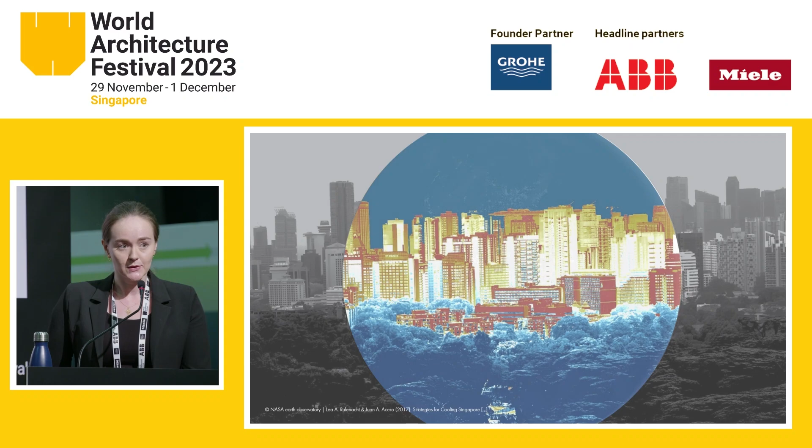Even though our cities only cover 1% of our land surfaces, the urban heat island effect accounts for at least 11 to 16% of global warming, reaching up to 30% in regions such as China. Building facades represent the largest urban surface area and have a significant impact on the urban microclimate.

Singapore might be a perfect example of a city suffering greatly from heat, with an average temperature of 29 degrees for the hottest and 26 degrees for the coldest months in the year, whereas the green and wetlands in the north indicate, in comparison to the dense city center, a surface temperature reduction of up to 15 Kelvin, mainly referred to the natural cooling effect by water evaporation.

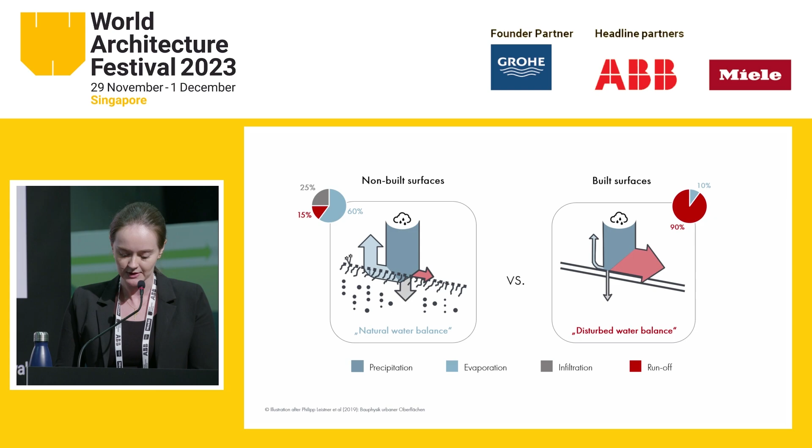While natural surfaces allow for 60% evaporation of incoming rainwater, built surfaces require 90% to be drained off as runoff water into the urban sewage system, which causes the second big scale problem we are facing worldwide: inundations that affect all cities with a high ratio of sealed surfaces.

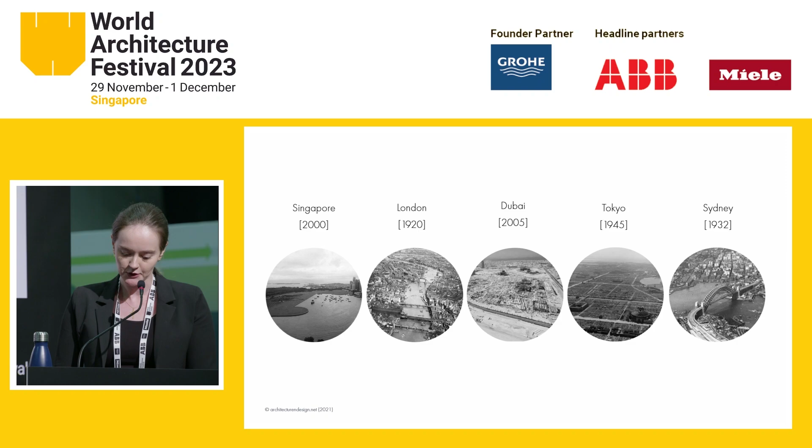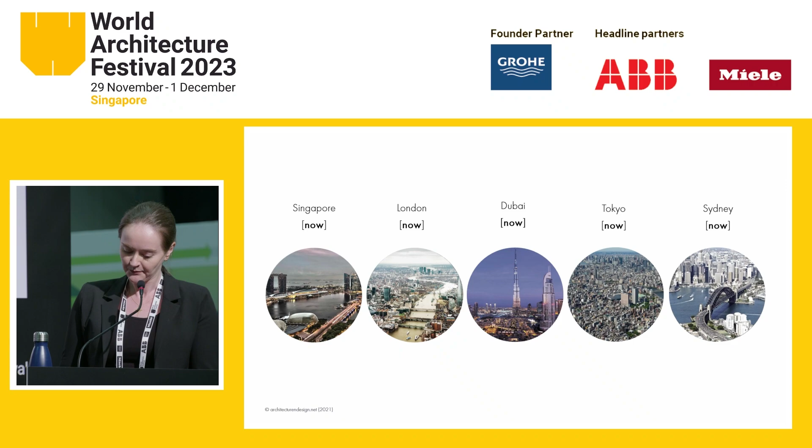With the increasing densification of our cities and the rising precipitation rates due to climate change, the update of our urban sewage infrastructure is still missing. In this context, let me add that the sewage system of only Germany is about 15 times the equator length. So redimensioning the global sewage infrastructure of all these vulnerable cities worldwide would be an almost impossible economic burden for our world and not solve the heat island problem worldwide either.

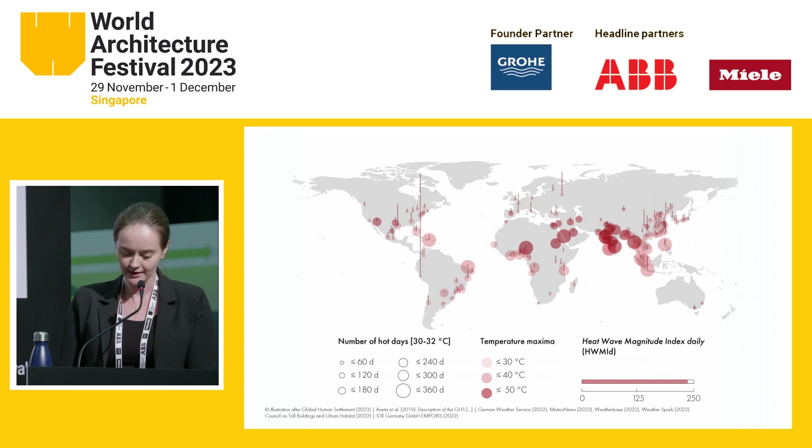But there's also a huge potential in the facade of increasingly tall buildings, not only in terms of an aesthetical design revaluation, but also in terms of an ecological activation to reduce the urban climate footprint without occupying any further ground surfaces in our cities.

That's exactly where we come up with HydroSKIN, an artificial, lightweight retention surface in the building facade to absorb the wind-driven rainwater that hits the building facade at an angle, to make this water accessible inside the building in order to reduce fresh water and energy consumption, as well as to humidify the textile skin on hot days for cooling the building and its environment in a sustainable way by evaporation.

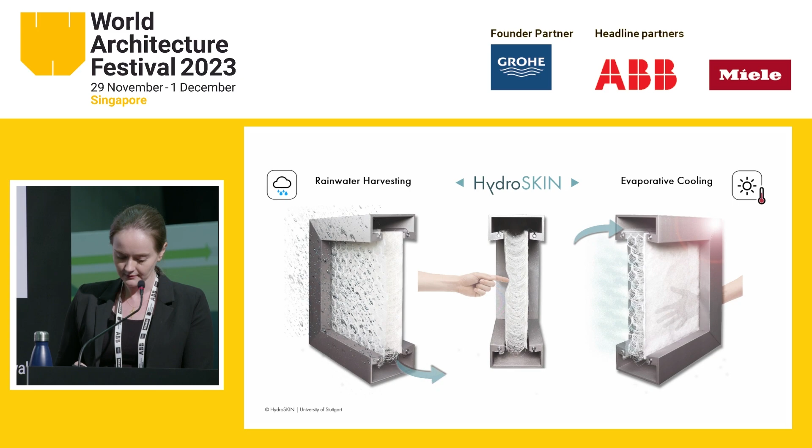So now you might ask, why are they using textiles in the building envelope, which are certainly a traditional, even if not a quite conventional building material? Well, it is not only about lightweight construction in order to reduce the building's embedded mass, grey energy and CO2 emissions to a minimum of 1 kilo per square meter, whilst offering a highly customizable building envelope solution enabling the installation of HydroSKIN to almost all new and existing building types.

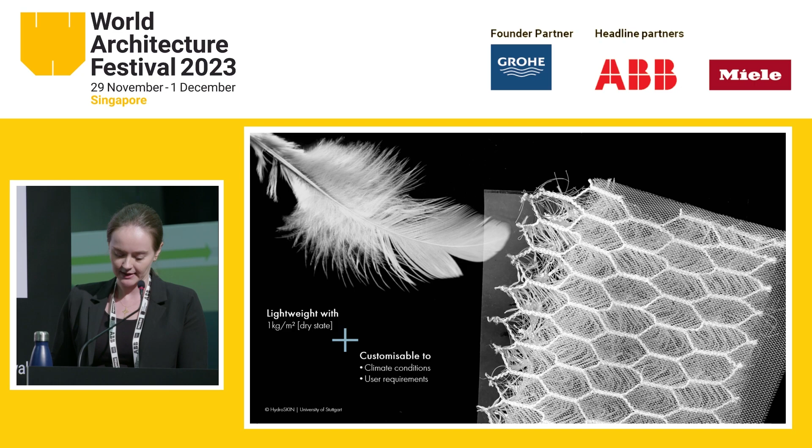But whilst conventional hard facade surfaces, as glass in this case, reflect incoming rainwater droplets with a great splash off, the textile outer layer of HydroSKIN offers such a high permeation that allows the water droplets to almost fall through.

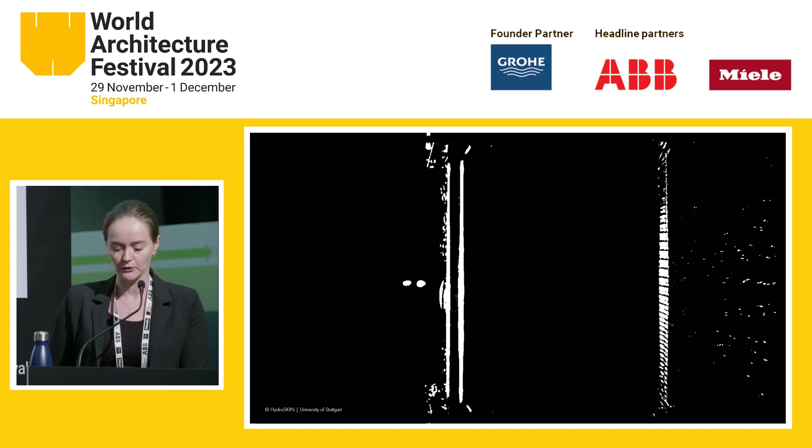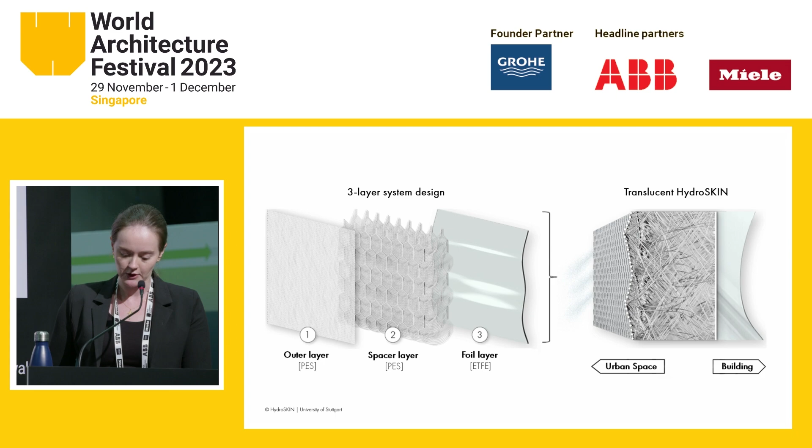So HydroSKIN consists of a translucent, multi-layered textile and film-based facade design comprising an outer layer, a special spacer layer and a foil, and integrating an additional highly absorbent intermediate layer to extend its cooling performance. For example, in very hot and dry regions this may result in an opaque system design.

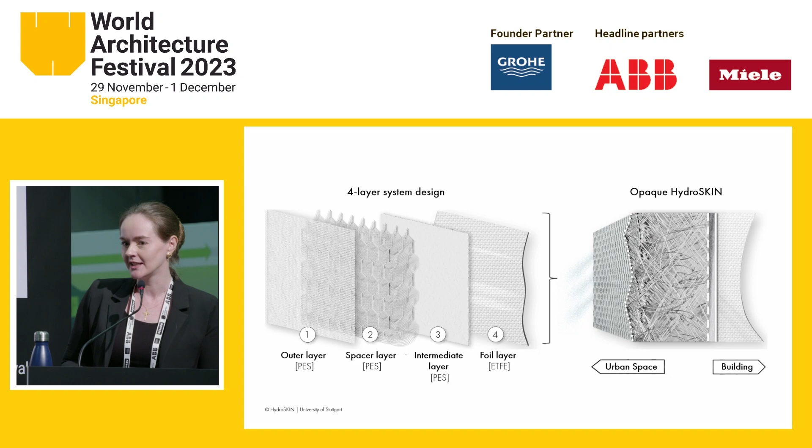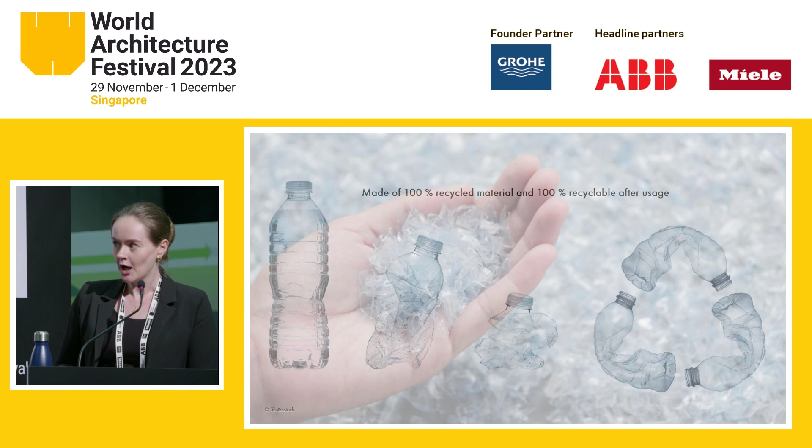All these layers are joined together by means of textile manufacturing techniques into an easy to disassemble system, which is not only fully recyclable, but can also be made out of recycled materials such as PET bottles.

Let's have a more detailed look on how it works. Well, the wind-driven raindrops are split by the water-permeable outer layer and transported via the connecting threads of the spacer layer to the water-guiding foil, where they are drained off into the lower profile system.

And during irrigation on hot days, the droplets accumulate in this spacer fabric, and the high air circulation in this open porous spacer textile favors water evaporation and enhances the cooling performance of the facade.

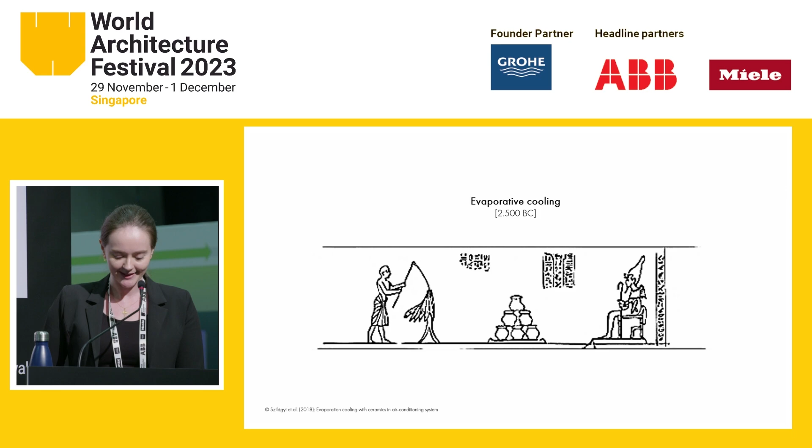Many years ago already, they made use of evaporative cooling by water-filled ceramic pots, a very simple cooling technology that doesn't need any further energy supply, excluding the manpower in this case, since evaporation is nothing less than the phase transition of water from its liquid state to the gaseous state at temperatures below the boiling point, which extracts heat energy from the surrounding air that causes the cooling effect.

And also our skin uses this technology, of course. So textiles open up a unique potential for evaporative cooling, because with a minimum weight per unit area, they provide an enormous surface area that can even be precisely configured.

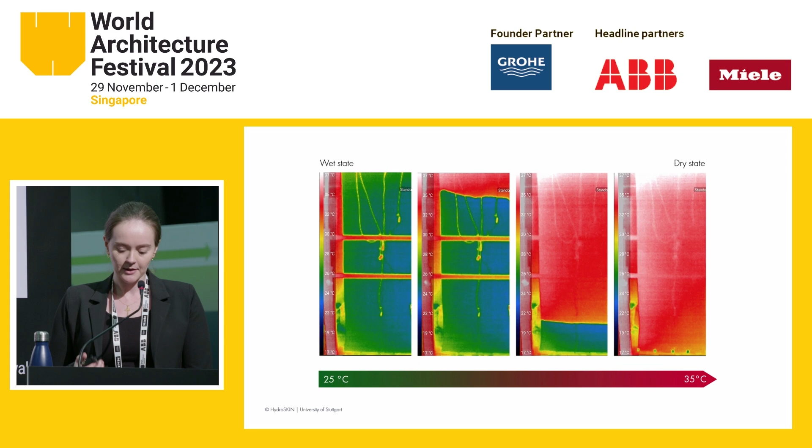And wetting of textiles is accompanied not only by a significant temperature reduction on the one hand, but also by a cool air downflow into the urban space when applied at tall building facades, as you can see on the right-hand side. And as a benefit for height, tall buildings even enhance the cooling performance of HydroSKIN in terms of rainwater absorption as well as in terms of evaporative cooling performance.

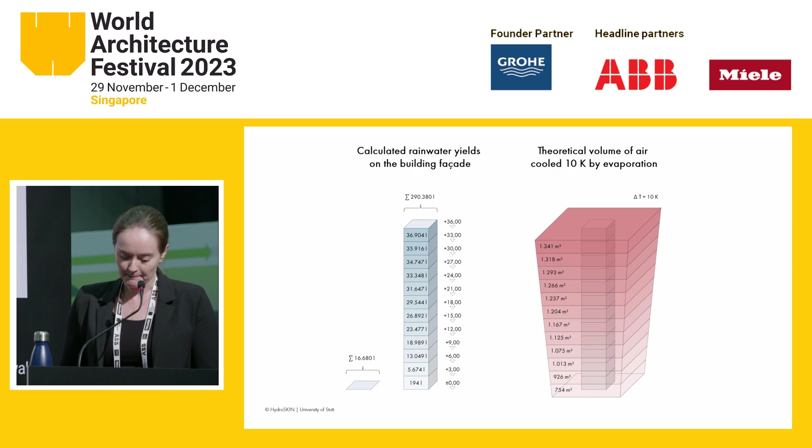Whereas in theory, the roof surface of this small exemplary high-rise building is only exposed to approximately 16,000 liters of rain per year, a more than 17 times greater amount of 290,000 liters impacts the facade surface of the building, and the volume of air that can evaporatively be cooled by 10 Kelvin also increases with the building height by nearly 2 times and is even able to approximately compensate the solar heat emission of a conventional glass facade.

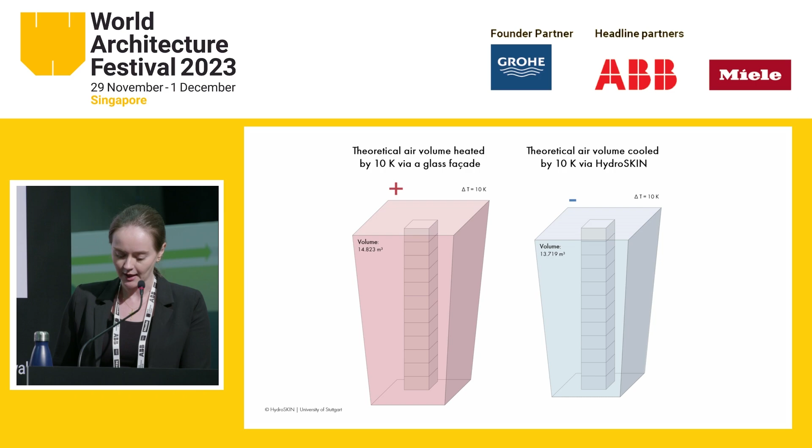In other words, each square meter of HydroSKIN could almost neutralize 1 square meter of conventional building facades in our cities.

And since almost 1 year, the first HydroSKIN prototypes have been installed at this small exemplary high-rise building at the University of Stuttgart to verify their performance for the first time under real weather conditions with great results.

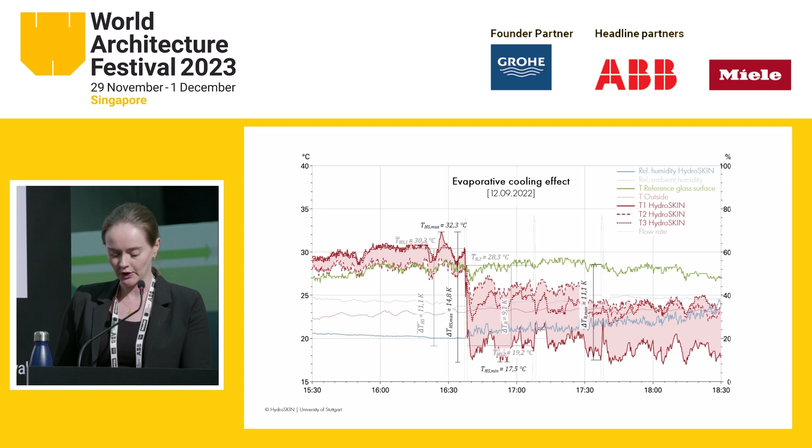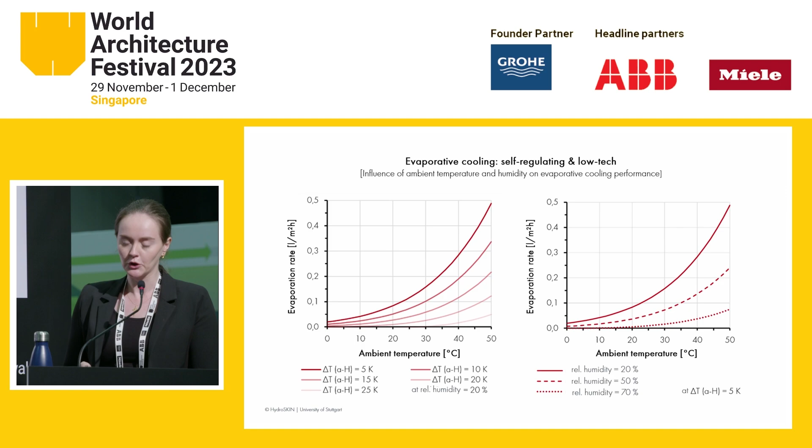Our measurements show a temperature reduction of 10 up to 15 Kelvin on the facade surface depending on the ambient climate conditions, of course, since evaporative cooling also represents a self-regulating cooling principle, which means that its performance can achieve a very high temperature reduction on hot days, but a very low cooling effect on cold days, thereby also excluding any undesirable cooling out of the building on rainy winter days.

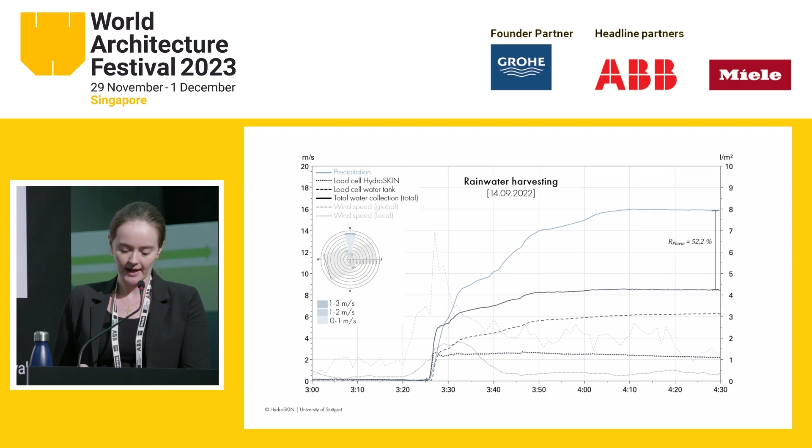Even in disadvantageous wind conditions, more than half of the precipitation water has been absorbed, and by means of an intelligent rainwater use concept, one can obtain up to 46% of fresh water savings in a residential building when using rainwater for plant irrigation, toilet flushing, wash machine operation, or building service components.

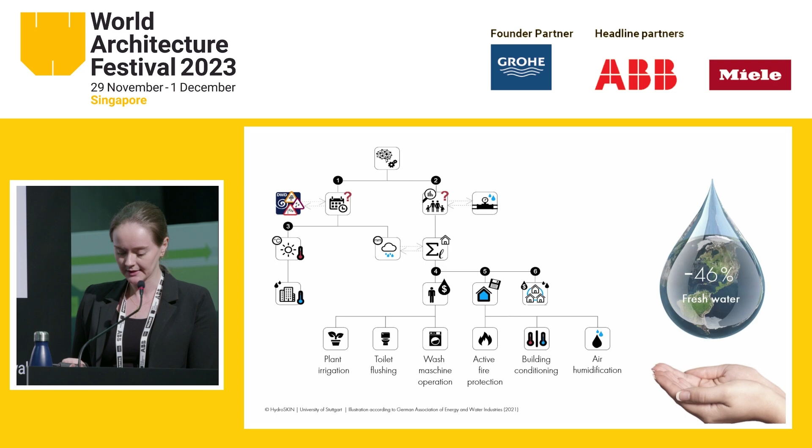Depending on the water use concept, up to 26% of energy consumption can be saved for water pump and cooling purposes, especially above a low-rise building typology. For high-rise buildings and above, there's even an annual saving potential of 3 million kilowatt hours per building.

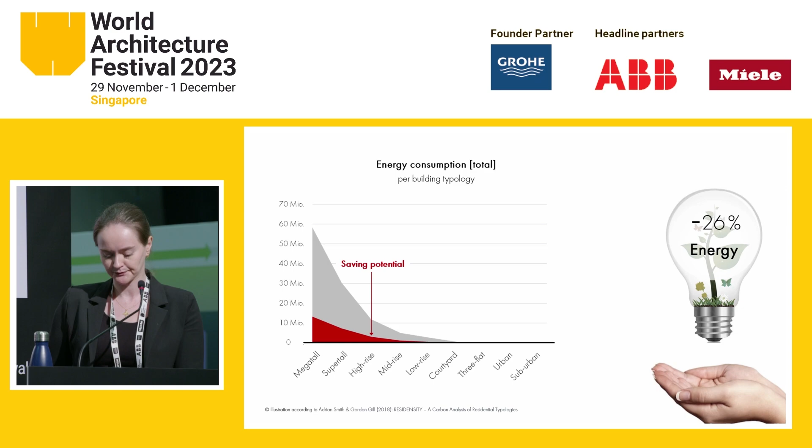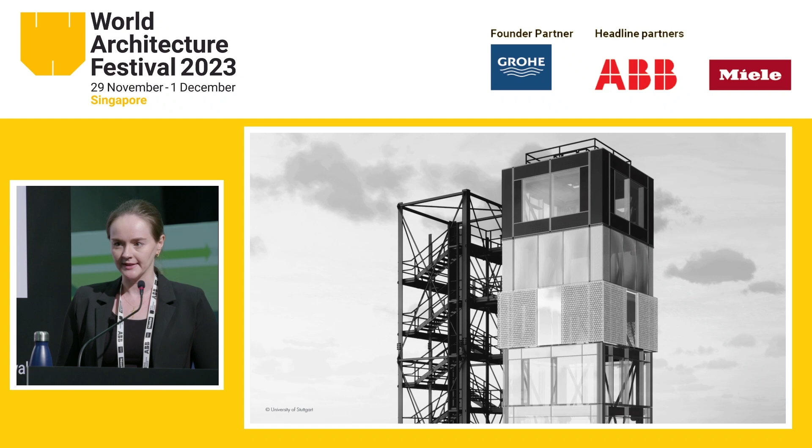So how do we bring this huge potential into building practice? Now that the first hydroskin prototypes have been monitored for more than a year, we are planning to complete two hydroskin facades at our experimental high-rise building in Stuttgart within the next months. Among them, one unitized glass facade with suspended hydroskin curtain wall elements, and one multi-layer, film-based facade system without any conventional building materials, consisting solely of foils, membranes, and textiles.

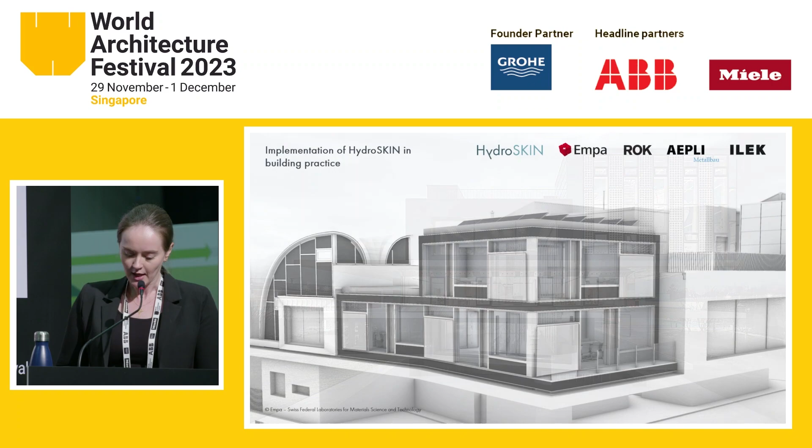Our first commercial project will also be realized in spring next year. It's the nest building of the Swiss Federal Laboratories for Materials Science and Technology in Switzerland, where the easy retrofitability of hydroskin is going to be demonstrated.

Finally, I don't want to leave you with the idea of hydroskin being a unique white curtain that might only disturb the view out of your window, since there is a great wealth of design variations in the field of textile architecture: translucent, colored, 3D shaped, movable elements, as well as the opportunity of precise customization by printing the textiles and foils.

I also warmly invite you to physically discover hydroskin by your own. And when our body suffers from fever, we cool it down with a damp cloth. So why do we not use the same technology to cool down our cities suffering from global warming?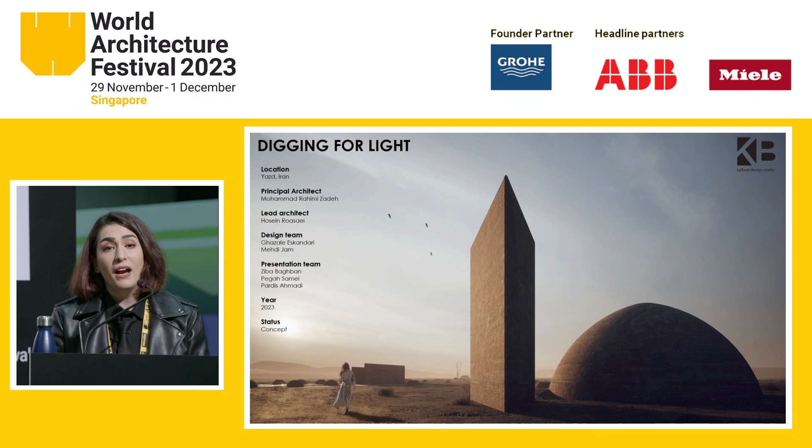Can you imagine a house designed in a contemporary manner that follows the same principles as ancient architecture? Of course, these principles must be updated, but in fact, with minor changes, they can meet our fast-paced technological life. Here we use architecture as a problem-solving tool based on our ancient architecture from Iran.

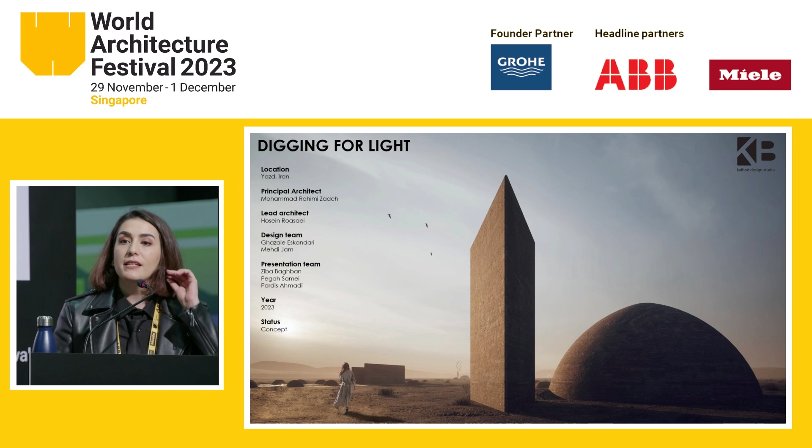Let's begin with the site. The UNESCO registered World Heritage ancient city of Yazd, described as the noble city of Yazd by Marco Polo, and its nearby villages are great examples of Iranian traditional architecture. This city is located amidst the most desolated parts of the Iranian plateau, which stands primarily on a barren, settled land.

A plain with a desertic climate, solely based on its architecture, it has turned into one of the cradles of ancient civilization.

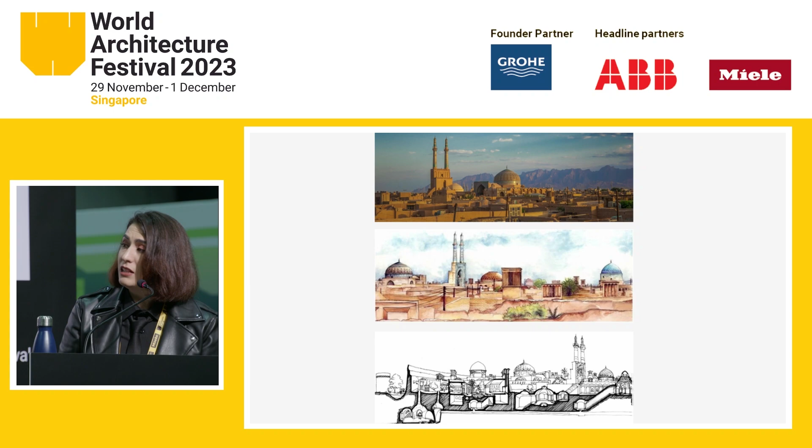Through our in-depth research, we found that the winning element of the ancient architecture of Iran is based on its resiliency, which has managed to turn into a plugged-in system. However, due to the climate of Yazd and its specificness, as it has a desertic climate, its architecture and urban planning follows certain principles to bring comfort to people.

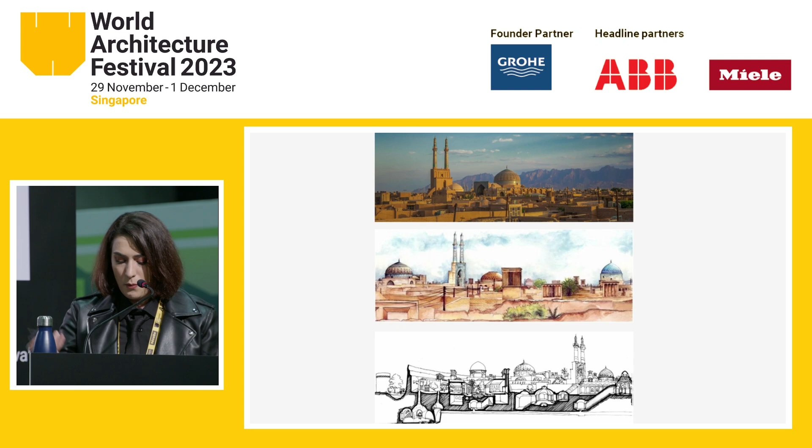Now, the question is, how can these principles be used as a reference in today's architecture? Amidst our research, we found that qanat plays a game-changing role in this resilient system, where each element is connected or plugged into each other through qanat infrastructure.

As you can see, these are qanat systems from the deserts of Iran. We use this approach to define our own project and our own plugin system made responsible and responsive to the harsh climate of Yazd.

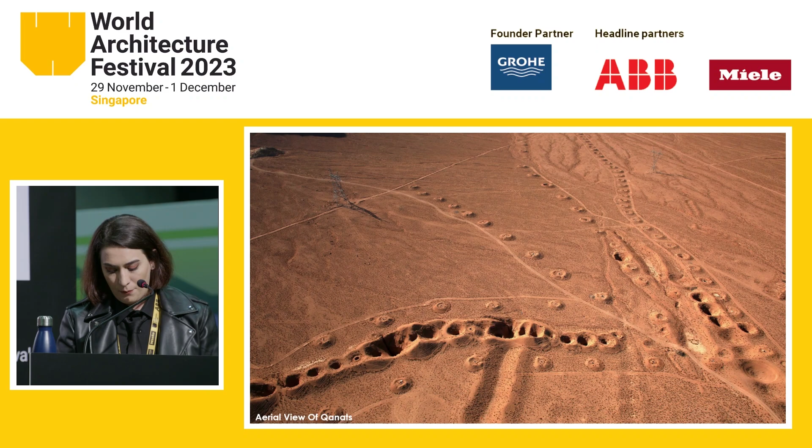To quickly explain what qanat is, we can say that it's made of a series of underground water canals that still function in arid regions, and to this day, they supply water for close by human civilizations. It taps underground mountain water, and through a series of gently sloping tunnels, which often are several kilometers long, provides water for irrigation and domestic use.

Now, getting back to our project and narrowing down to the exact location of our site and the place we have chosen to propose our project: the historical and semi-abandoned village of Ernan is where we chose our site and proposed our project.

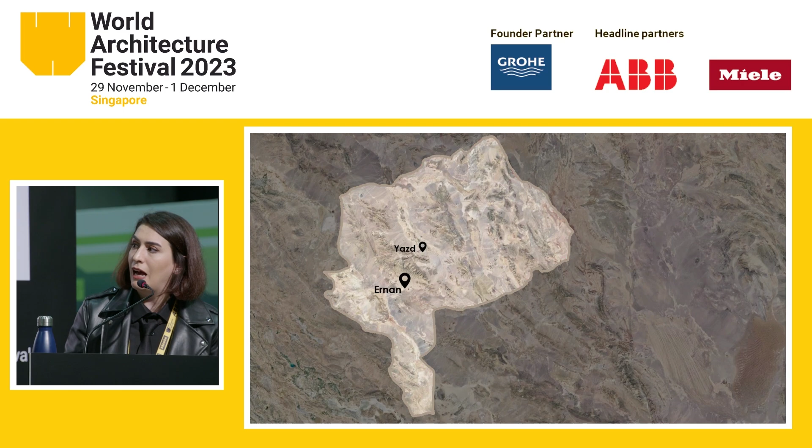We were trying to add value to these surroundings, whether to its untouched nature, man-made elements, or even the nearby human society. As you can see, these are the deserts of Iran, and our Ernan city and village is exactly located amidst it.

Also, neighboring our site, there is a seasonal lake which unfortunately only a trace of remains today. Lots of dried qanats used to work with this seasonal lake, and numerous villages need proper public, medical, and educational facilities.

Qanats, landscape, earth, ancient building techniques, and historic references gradually formed our ideas. We did not want to just make a house in the middle of an abandoned place. We wanted to use architecture to solve the existing challenges.

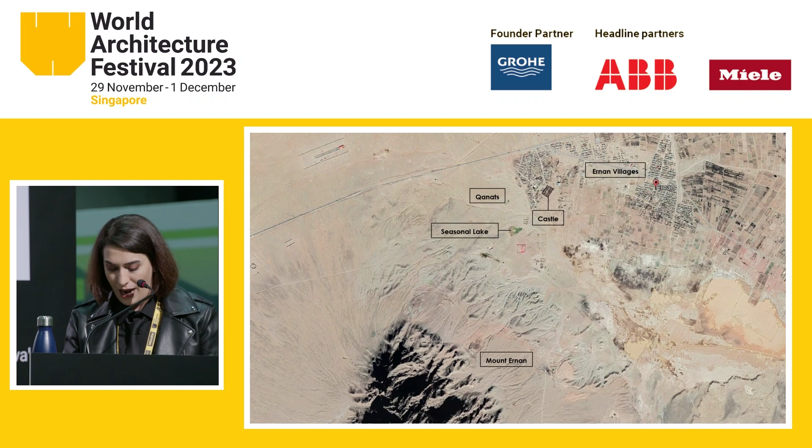So we established a triad of programs. Besides the house, we designed a school and a massive water reservoir to give something to the community. These are the triad programs: the house, a school, and a water reservoir.

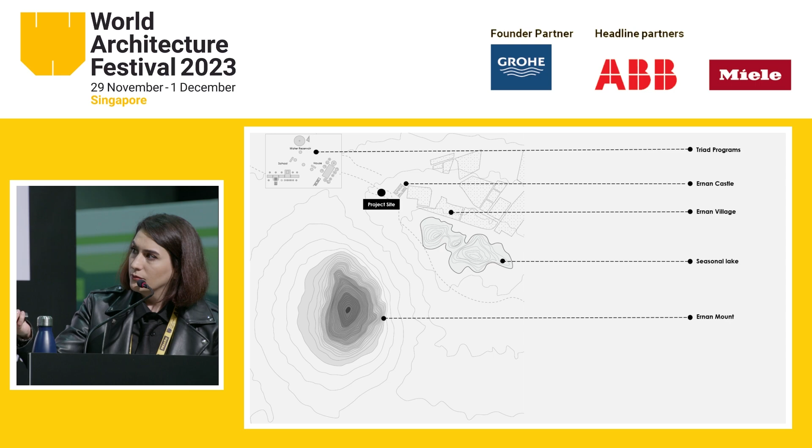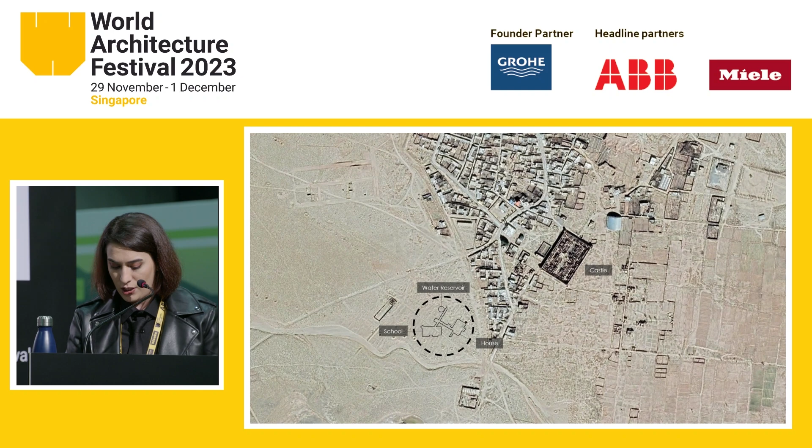The home takes its orientation from the ancient castle, and it's sunken underground with the rest of the composition to minimize the thermal exchange between inside and out. With this solution, we also tried to push the brick further by using another ancient Iranian architectural element known as badgir, or the wind catcher, achieving an air circulation system that is entirely green and effective.

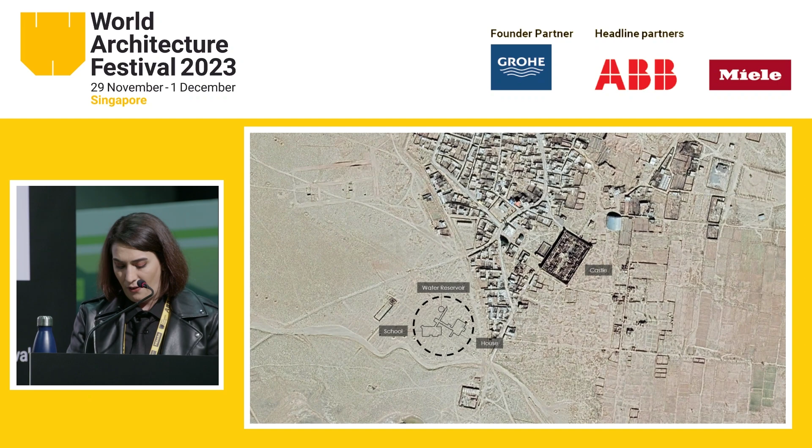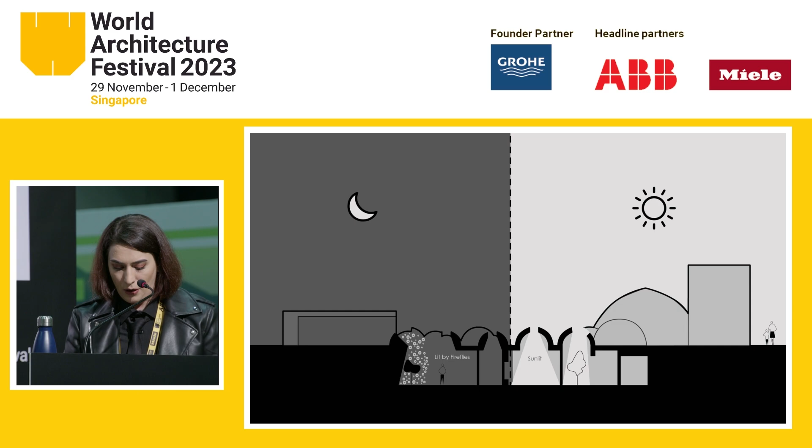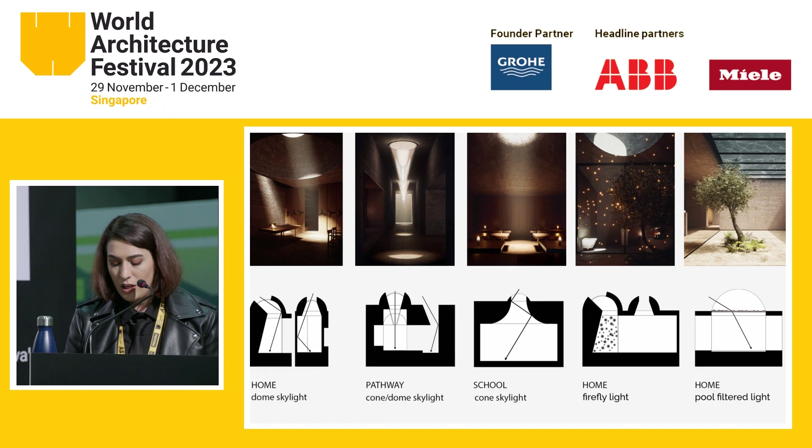The interiors of this house are illuminated by both direct and indirect light. Natural light enters from the domes and the glass pool functioning as a skylight. They differ from each other in form, size, and position, creating different atmospheres at any time of day. The desert breeze also blows on the surface of the thin layer of pool water outside, creating a wavy pattern that illuminates the house's central yard beneath. The central yard also houses fireflies, creating a habitat beneficial to humans as they address the biodiversity of the Iranian deserts.

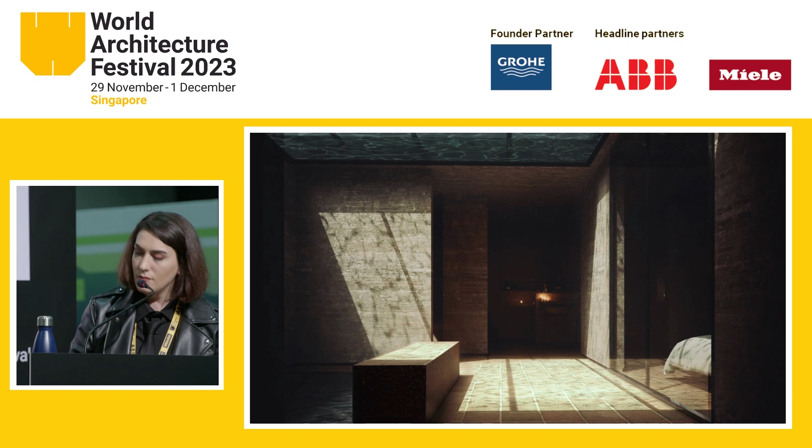On the other hand, the indirect light comes from the small alleys lit by domed skylights. These are the domed skylights that are sunken underground and provide light.

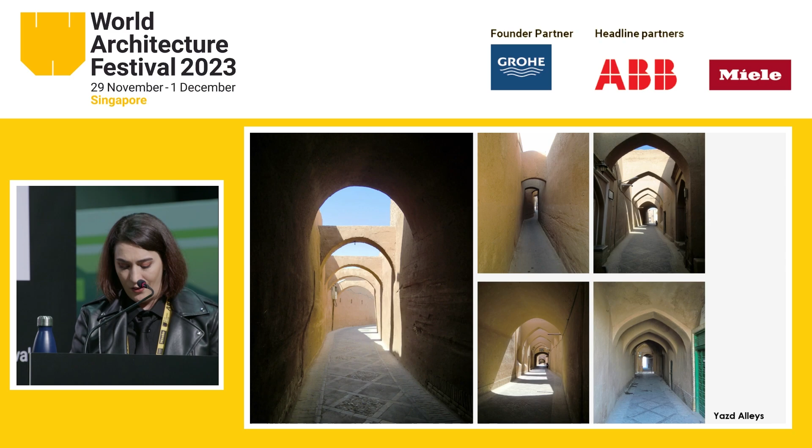Speaking of alleys, yes, alleys were the source of inspiration for our projects. Their arches also gave us another ancient architecture from Iran, called ravaq, or small alleys. They create shade, thermal comfort, and a rhythmic play of light and shadow inside the pathway of the school.

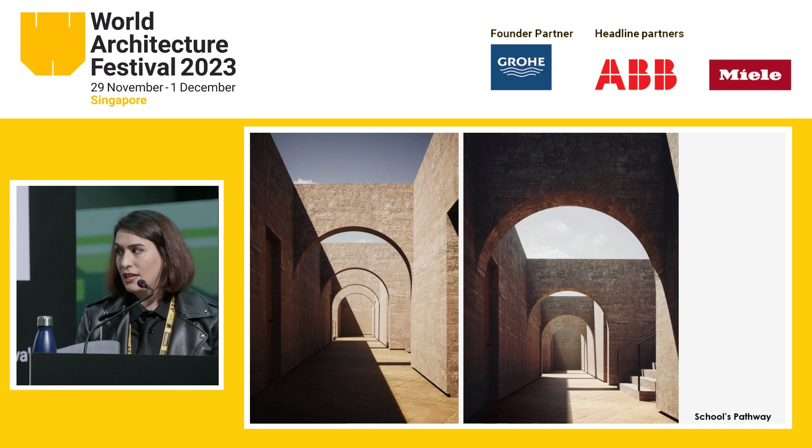This is our school. This pathway is sunken underground but doesn't have any roofing. As you can see, these arcs provide shade and minimize the thermal exchange.

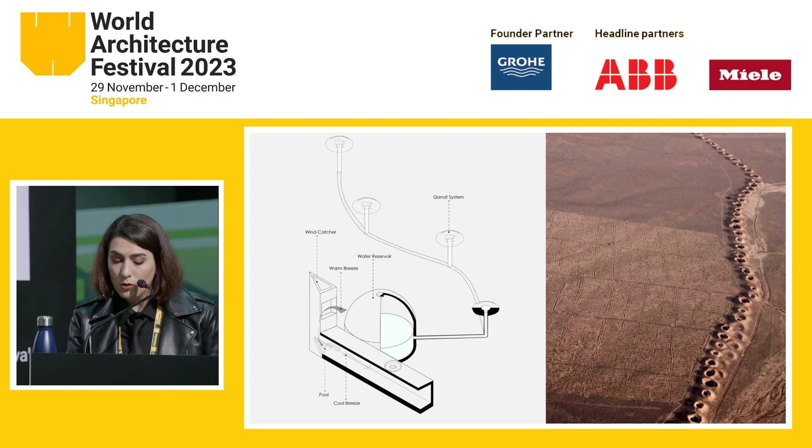Finally, to follow our primary goal and add value to the site's amazing surroundings, we designed a water reservoir. Connected with existing qanats, it serves the community and provides water for nearby farms. Besides its function, the form of this water storage also takes note from ancient Iranian architecture and is designed based on the old water reservoir of Iran, also known as Ab-Anbar.

To complete this composition, we added a monumental element to function as a wind catcher. As you see, the domed shape is our water reservoir, and the monumental triangle shape is the badgir.

The wind catcher, or badgir, provides ventilation for the project. It works with openings, and when the warm breeze of the desert blows into the openings and the badgir, it passes through water ponds that reduce the temperature drastically. The wind also continues to flow into the narrow and long corridors, providing a net zero air circulation.

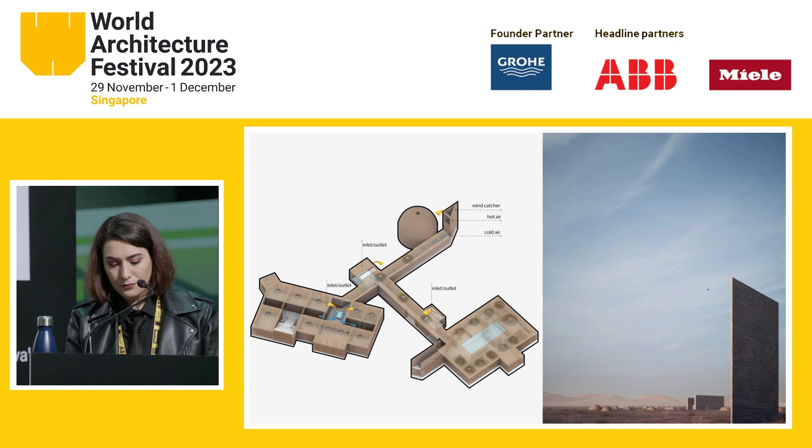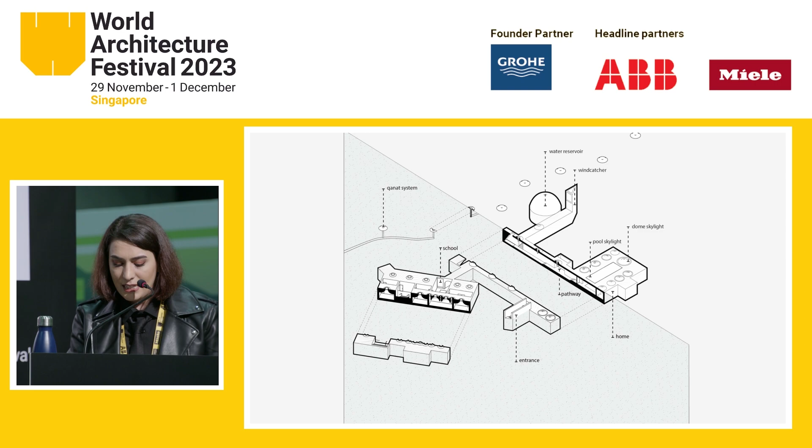Finally, a pathway connects these triad programs—the house, the school, and the water reservoir—and reinterprets the qanat system with its domed skylight. As shown in this section, the entire project is made of a pathway that connects this triad system. It creates a human-made settlement that pays tribute to the historic site and its impressive natural surroundings, by reusing and remodeling old techniques and achieving a sustainable way of living in harmony with nature.

Now, please take a look at this animation, if it plays.

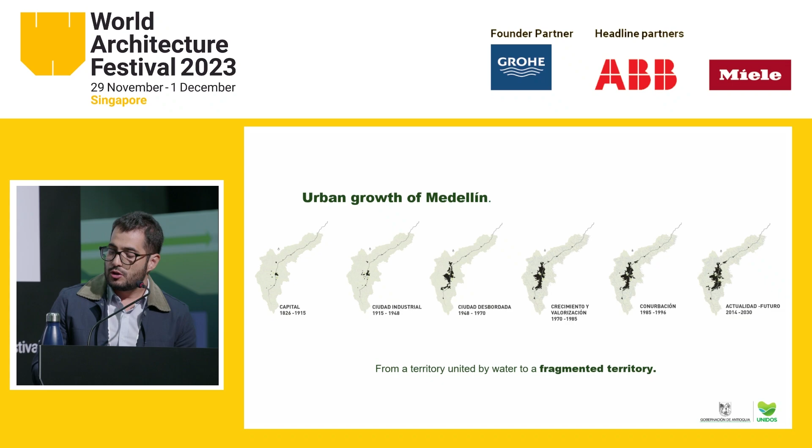So we launched in 2012 a very strategic program for territory planning. It seems like a public space beside the river, but actually it was a full program with territory planning, occupation modeling, and urban transit development, because in the 70s we channeled the river, so we lost all its natural behavior. As I told you before, we developed the city into the slopes, and we are more like a canyon, as you see.

So we also developed the riverbanks with informal settlements. The waste was really strong. So we launched this project, and now we are seeing the results. But we have now passed from the municipality government to the provincial government.

You know, Antioquia is the biggest province in Colombia, and Medellin is the main city of Antioquia. Antioquia is full of water resources. We have the three biggest rivers in Colombia. The river crosses Antioquia, and we have Medellin in the middle, in the center of Antioquia. That is the right map that you see on the screen.

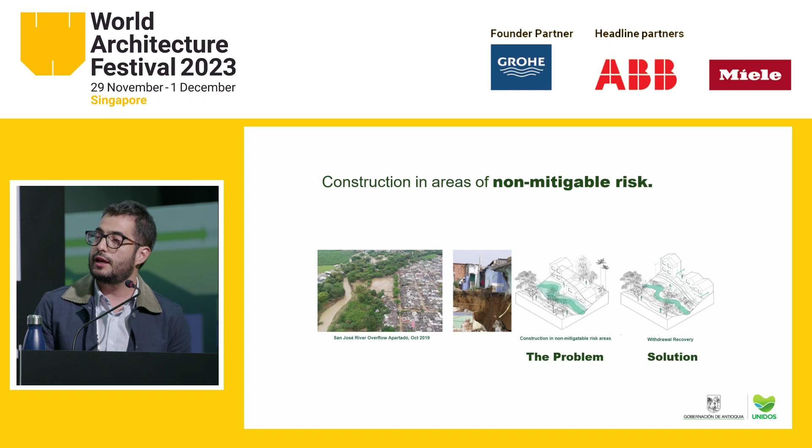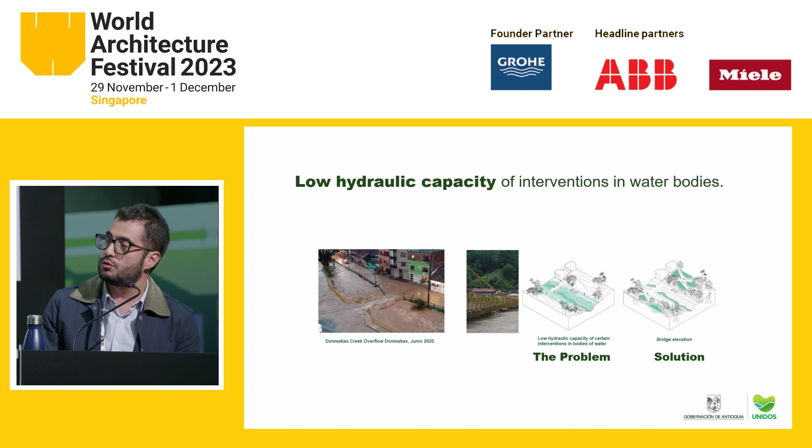We had a lot of increase in levels because of the climate crisis, and we started to think about public space, waterfront public space projects, as part of the big program, developing strategies and guides to create projects in every municipality of Antioquia. Most municipalities in Antioquia are surrounded by water, growing beside a waterfront, river, or sea. So we needed a big umbrella for the government, a strategy. So we declared a climate crisis plan in order to address the problems, the programs, the indicators, and the actions.

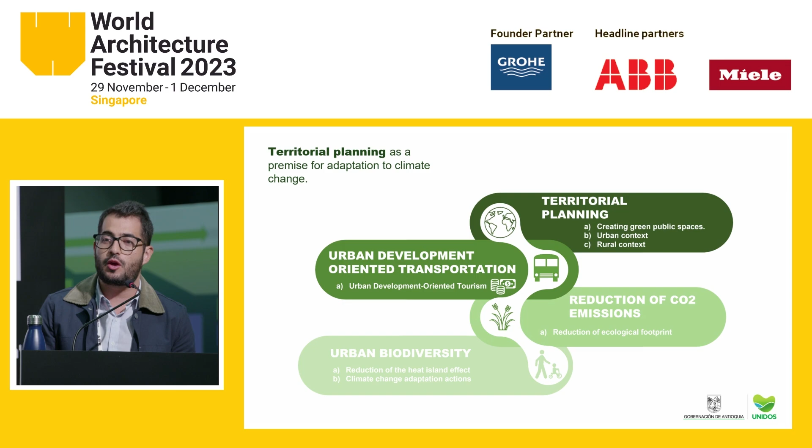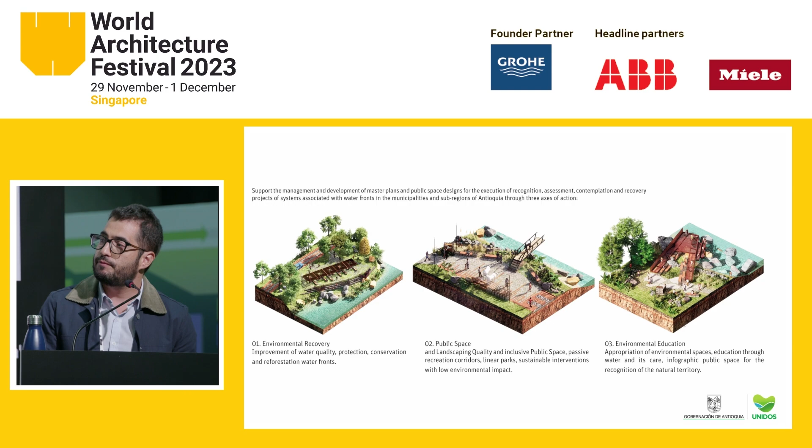And one of the actions was to develop the Antioquia municipality river parks. We convinced the mayors of the municipalities and invited them to take on this project and apply it to their territories, so we could create and launch 23 projects in 23 different municipalities. Some of them are already built, some are under construction, some are designed as master plans or fully designed prototypes, as you will see.

So the main message is that we took a solution, a full program, in a big city such as Medellin that was presented before 2018, and we were also awarded the Water Prize. It seems to be a waterfront public space, but actually it's a full program with urban development, transportation, environmental restoration, and city safety.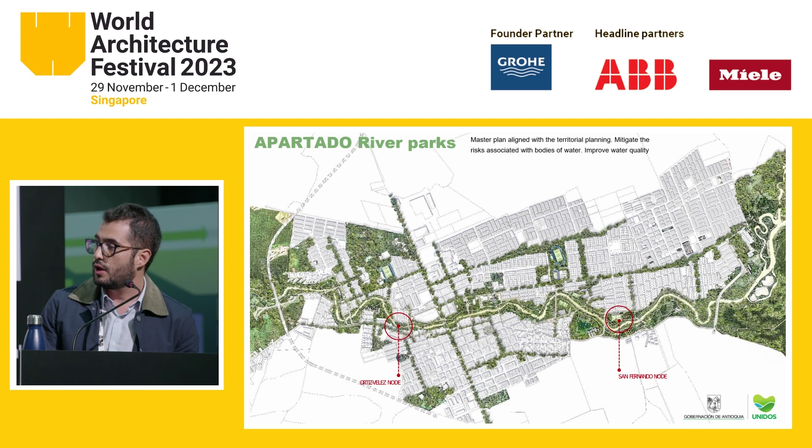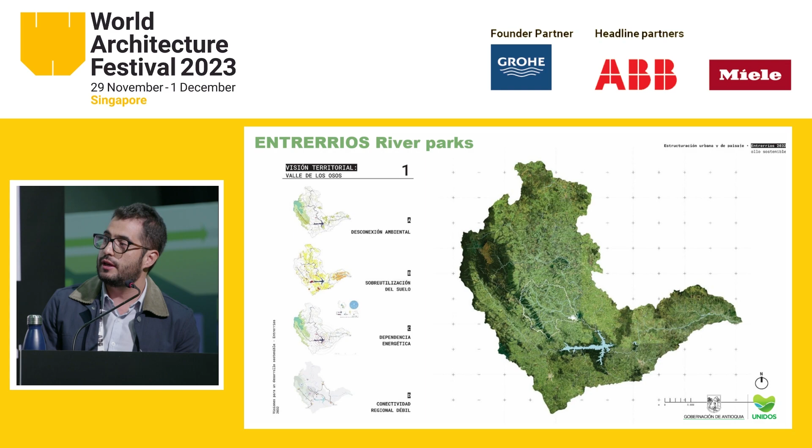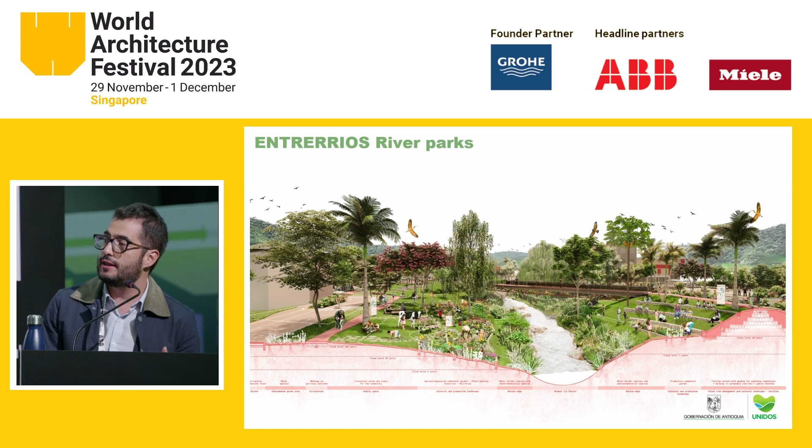So we are already constructing the fully designed prototypes. There are other scales of municipalities. This is a 10,000-inhabitant municipality, and we need to create something like a sponge park in order to mitigate floods in the municipality.